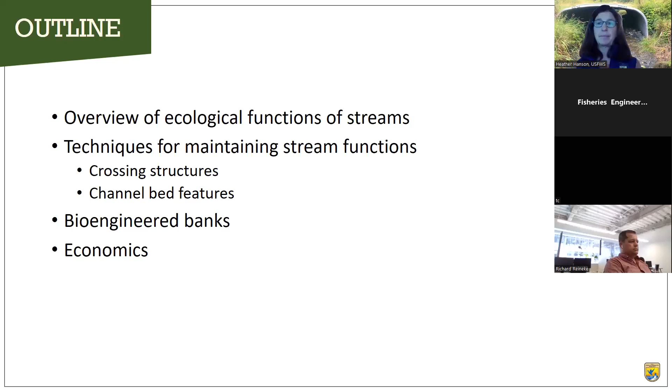So, stream ecosystem functions. Streams provide many ecosystem services to aquatic and riparian communities. These communities are more than just a collection of organisms; they are interconnected by numerous ecological relationships that are both biological and physical. Streams help support those interconnected relationships. This is a list of some of the functions that are important to stream health and ecosystem health.

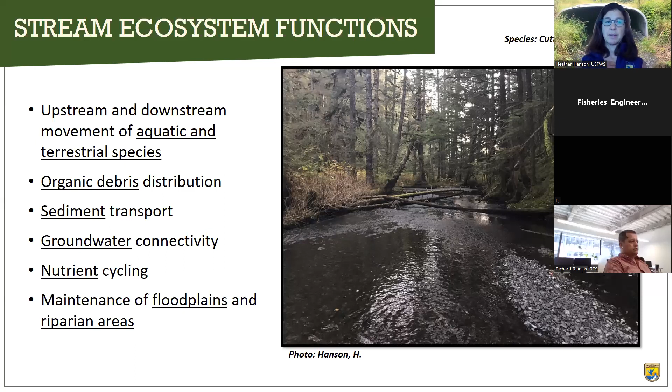All of these processes can be disrupted by man-made infrastructure such as undersized culverts. In the next few slides, I will give you an overview of these stream functions and some of the negative impacts that we are concerned about in our habitat restoration work.

In order to understand stream ecosystem function, it's important to broaden our vision and think about the wide variety of aquatic and terrestrial species that are reliant on healthy stream corridors. Some of these species are strong swimmers and excellent jumpers, like adult salmon, but others can't jump at all, like Pacific lamprey. And some terrestrial species may need extra headroom, like this moose.

Our restoration work focuses on removing or replacing undersized culverts on salmon streams. So I want to elaborate a bit more on the habitat needs for salmon.

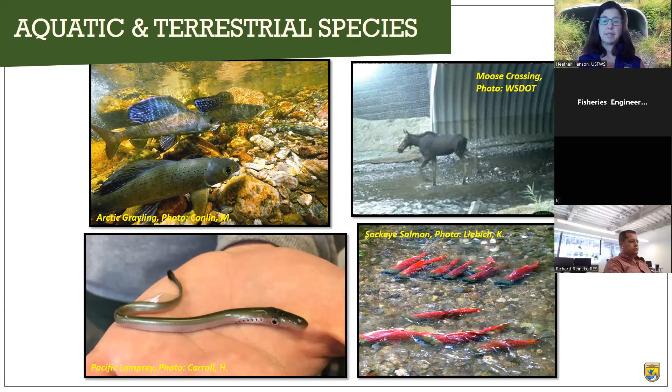Rearing habitat for juvenile salmon is often the limiting factor in the success of a stock or population. In Alaska, coho, chinook, and sockeye salmon spend their first one to three years in fresh water. Salmon use streams to move between freshwater habitats in their early life stages, moving up and downstream to find optimum water temperatures for feeding and overwintering.

Lake temperatures can be too hot in the summer, so they may move to small headwater streams. In the winter, small streams often freeze solid, and the fish will move to lakes or larger streams. They also move to find food: eggs, decaying salmon, caddisflies, and other insects. Very small streams can help juvenile salmon escape from larger predator fish like trout or pike.

Small to medium-sized streams are where we often find undersized culverts and opportunities for our restoration work. We focus on the needs of juvenile salmon and their habitat because their survival is important to increasing the overall abundance of adult salmon.

So streams are more than just travel corridors for aquatic and terrestrial species. They also convey wood debris and other organic materials. Woody debris is a dominant habitat-forming feature in forested streams. Debris accumulations create pools, scour holes, and change patterns of sediment deposition within the active channel. Wood also provides cover and a home for prey species and reduces water velocities.

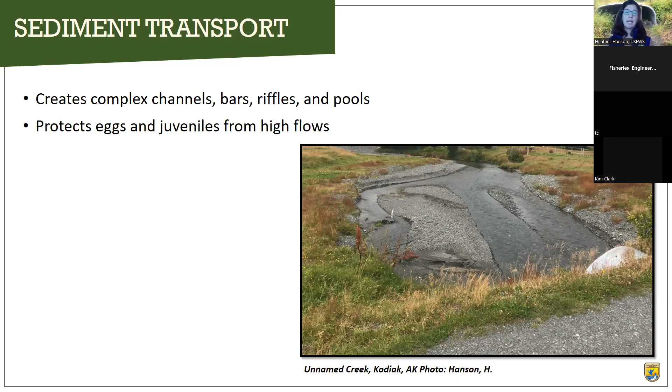Unimpeded sediment transport is important for many reasons. It creates complex channels, bars, riffles, and pools. It protects eggs and juveniles from high flows. It provides habitat for invertebrate prey. It sequesters and recycles nutrients. And it provides a vastly increased surface area for biofilm and algae.

Groundwater connectivity is another important issue for maintaining stream function. The hyporheic zone is the region of porous sediments where groundwater and surface waters exchange, and it is important to stream health. It helps sustain microscopic creatures and other invertebrate prey species, and it also improves water quality. Connectivity through this zone helps to maintain cooler temperatures in streams and wetlands during hot, dry periods, which is important for salmon to survive and thrive.

We often prioritize restoration projects in streams that have a higher level of groundwater connectivity because they are important thermal refugia for juvenile salmon when temperatures rise in the summer.

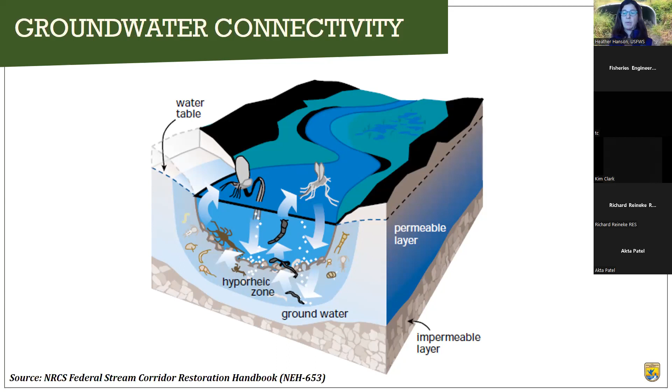Nutrient cycling is another important stream function. Salmon is a keystone species, and aquatic connectivity is necessary to make sure adult salmon can return to spawn, but also to provide key nutrients to the ecosystem. One study in the Pacific Northwest documented 137 species as dependent on salmon.

41 are mammals, including orcas, bears, and river otters. 89 are birds, including bald eagles, Caspian terns, and grebes. 5 are reptiles, and 2 are amphibians.

In that study, they found that just 6 to 7% of historic levels of marine-derived nutrients are reaching streams. Some streams that are thought to have habitat deficiencies are in some cases just starved. In Alaska, salmon-derived nutrients can persist in stream biota up to 9 months after inputs.

So most people picture a stream as a ribbon of flowing water, but the main channel is a small part of a stream corridor. This slide shows the wide variety of important habitats that are available to many different species in the floodplain and riparian areas in stream corridors.

Floodplain habitats are especially important for juvenile salmon. They provide cover from predation, refugia during high water, and food during their first few years of life before they smolt out to the ocean.

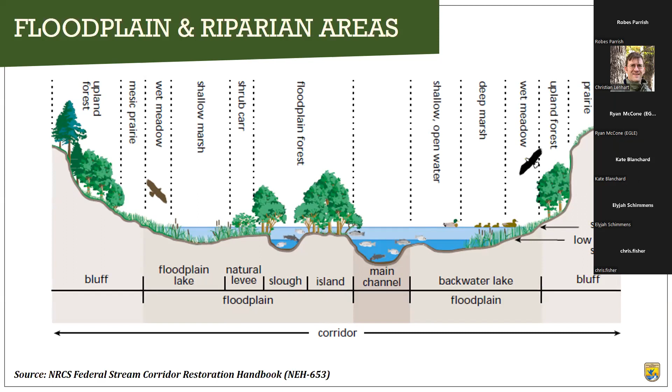I think this visual is useful to compare a stream that is providing minimal ecological function versus one that provides for a full suite of stream functions. I'm picking on this creek on the left because it is from my hometown. This concrete lined channel was constructed in the 1930s after a major flood event.

Fish passage has recently been improved at this location, roughness elements here, and resting pools have been added. Most of the other stream functions have been lost due to the concrete lining and the levees that continue for several miles and cut off all floodplain, groundwater, and riparian area connectivity.

Conversely, the stream on the right has deep pools, cool water, good spawning gravels, woody debris, and low banks that allow for connectivity with the floodplain. It's pretty much salmon heaven if we make sure that they can cross the road and access this habitat.

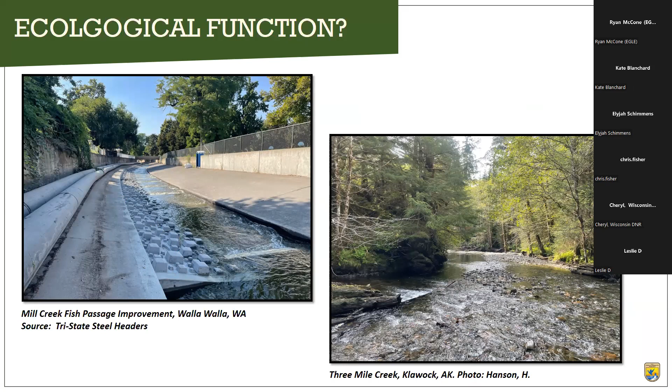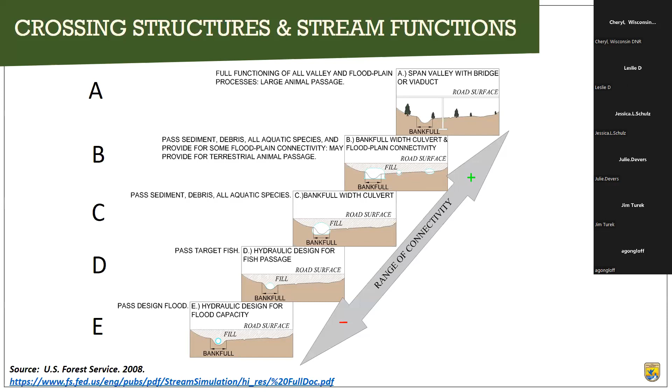This requires a crossing structure that is at least bankfull width or greater. Floodplain culverts may also be added to provide some floodplain connectivity. Here's an example of a culvert that is bankfull width with a floodplain culvert set at the bankfull elevation.

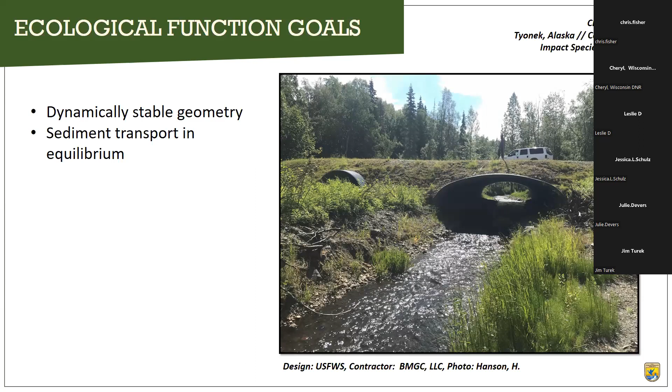Our functional goals for new culverts and bridges that we replace are: we are looking for a dynamically stable geometry. We want to maintain sediment transport in equilibrium at the crossing with the upstream and downstream reaches.

We want to see natural substrate in the pipe. We want to make sure to provide space for woody debris to move through the system, or through the culvert, at high flood flows.

We want to provide passage for all aquatic organisms. We want to provide terrestrial wildlife passage as much as possible. Obviously, that's somewhat limited in some cases where you don't have the headroom for larger creatures to go through, but there are some. Just providing banks and overflow culverts can help with that.

And we want to increase floodplain connectivity as much as possible.

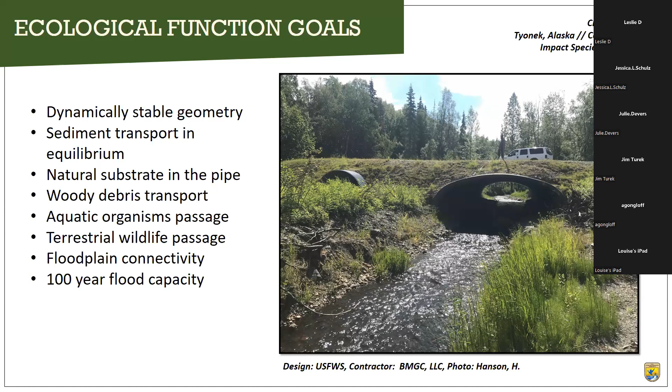Finally, we do design for a 100-year flood. Typically, the design flood on roads in Alaska is the 25 to 50-year flood. By designing for the 100-year flood, we hope to improve the longevity of these crossings we invest in, and improve the ability of these structures to withstand the higher flood flows we are seeing in Alaska due to climate change.

In order to achieve our stream function goals, our approach has been to heavily rely on a geomorphic analog for design of a stream crossing. We try to mimic the reference reach hydraulic geometry up to the bankfull stage, which is the flow stage where water leaves the channel and spills onto the floodplain.

We rely on the bankfull geometry rather than the active channel width or the ordinary high water width, because the bankfull geometry is a result of the hydrologic and physiographic setting of any given stream. In most systems, the bankfull stage falls between the 1 to 2 year flood flow.

If possible, we collect a reference reach profile and cross-section from the same stream where the crossing is located. I say 'if possible' because sometimes there isn't an appropriate reference reach for that, but if possible, we try to stay on the same stream.

The data we collect includes the bankfull channel slope, width, mean depth, max depth and area, and the low flow channel area and depth. Mimicking the reference reach geometry helps us maintain sediment transport in equilibrium with the natural channel.

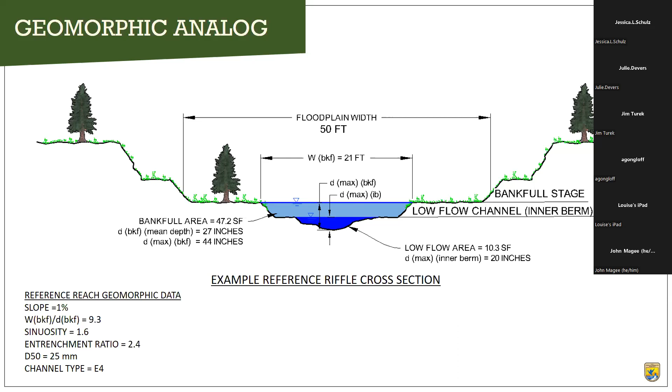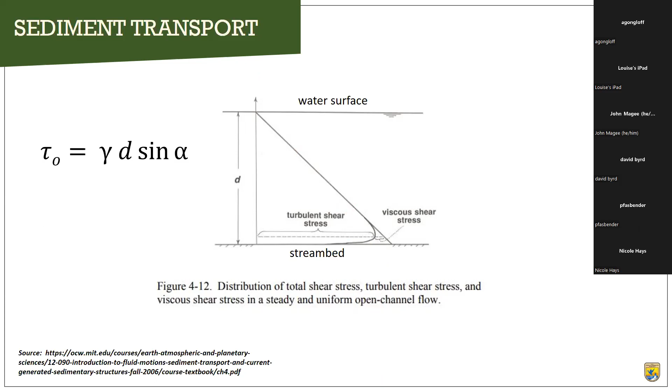This equation has implications for how we design the channel at our crossing. In order to maintain sediment transport equilibrium between the natural channel and the one we construct at our crossing, we maintain the hydraulic geometry at every stage up to bankfull. This is because the flows up to the bankfull stage are responsible for removing the majority of sediment in an alluvial system.

In order to avoid aggradation and resulting loss of the low flow channel, we try to maintain the mean flow depth for all discharges up to the bankfull stage.

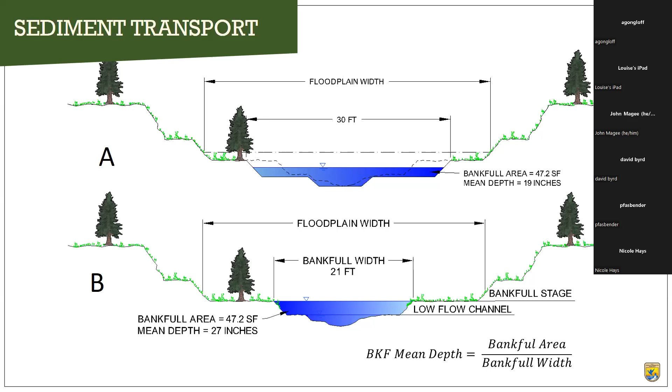So that covers flows up to the bankful stage or up to the 1 to 2 year flood flow. But at higher flows, unless our crossing structure spans the full floodplain width, we're usually going to be somewhat constricting the flow compared to the reference reach. This creates higher shear stress in the crossing structure at those higher flood flows. So here we're talking about the 2 to 100 year flood flows or greater.

We have some strategies for dealing with that. This is one approach I have already shown, where we provide a bankfull width primary culvert and floodplain culverts, with their inverts set around the bankful elevation. In the primary culvert, we provide headroom for woody debris to ensure debris can move through the system and help maintain habitat complexity. The floodplain culverts help provide floodplain connectivity and reduce shear stress in the primary culvert.

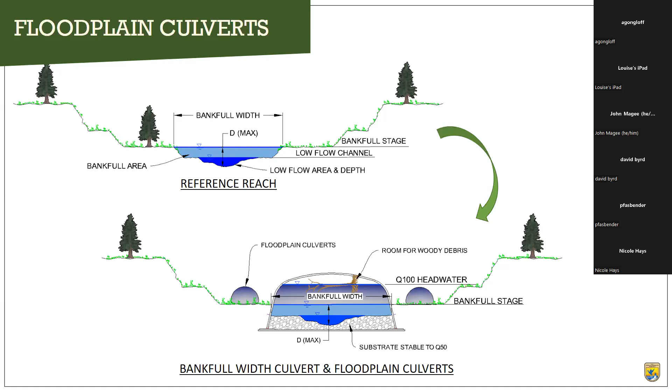This is an example of a small bankful width culvert with floodplain culverts that was constructed in Tyonek, Alaska.

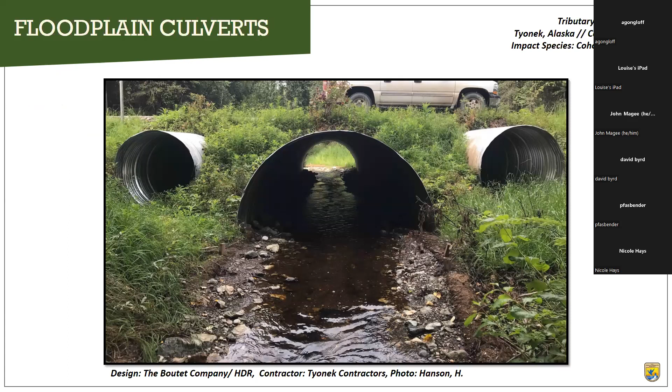Here's another approach: a wider culvert with stream banks constructed inside. Because maintenance of these banks is important to maintaining the bankful geometry, we design them to be stable up to a 100-year flood. Constructing stream banks inside a culvert improves stream function.

Pit tag studies have shown juvenile salmon passage actually increased once the flood flow overtopped the banks because the fish were able to use the slow water and roughness in the banks. So this is pretty cool how it really emulates what would happen in the natural stream, where juveniles would use the floodplain habitat to escape high velocities.

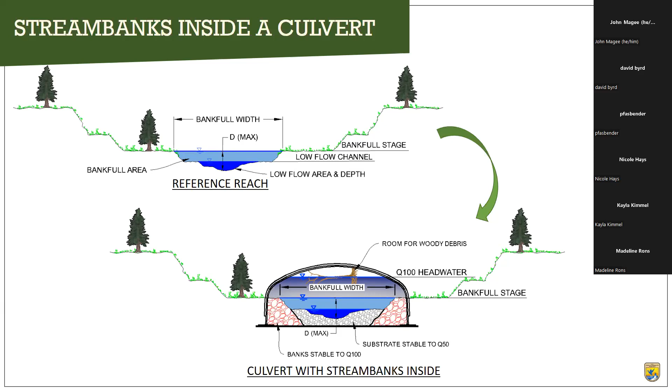This is an example of a culvert constructed with stream banks inside. The substrate in this culvert was designed to be stable to the 50-year flood flow. It has medium and finer particles mixed in to make a well-graded mixture, and Jess will touch more on that. This picture was taken about 2 years post-construction.

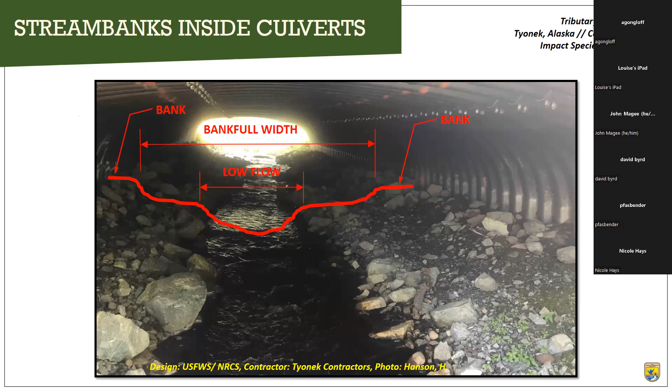Open bottom culverts are another option for improving stream function at a crossing. They allow for hyporheic exchange to take place and improve groundwater connectivity. We often end up using these structures on medium-sized and larger streams.

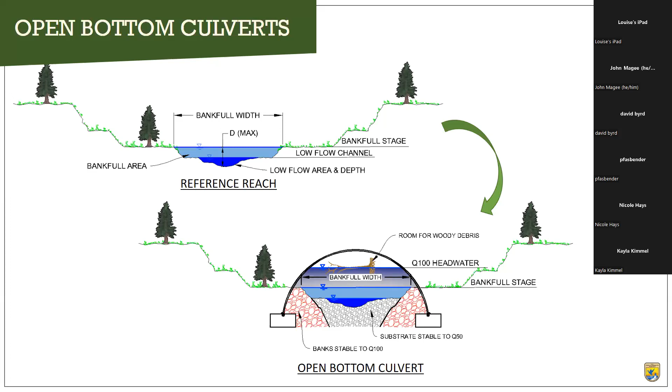This is an example of an open bottom culvert. Large rocks were used for the banks inside this culvert, which is fine, but they could have been better filled in with sediment to prevent fish entrapment on the falling limb of the hydrograph. Overall, this culvert has been functioning well for the last 8 years.

I want to point out that sediment transport is happening through the channel cross-section, with spawning-sized gravels being transported along the stream bed.

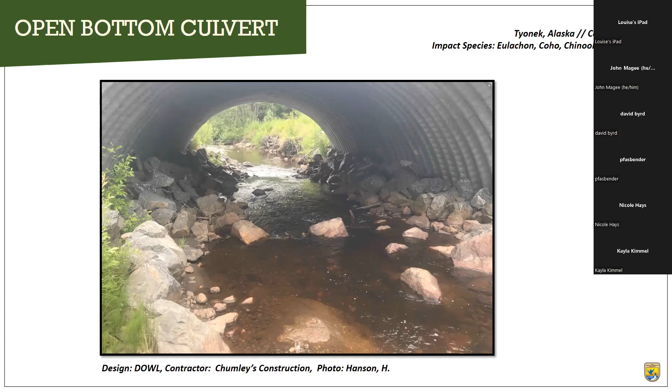Tidally influenced crossings are challenging. This site originally had a fish ladder that was ineffective most of the time. You might think culverts located where a stream outlets into the ocean only need to be passable to adult salmon. However, there have been telemetry studies documenting juvenile salmon moving through saltwater between watersheds during their rearing life stage. So we try to make tidal culverts passable to all life stages 90% of the time.

At this project, the culvert was replaced with a bridge and a roughened channel was constructed from the crossing down to the mean low tide elevation. Despite the large waves that sometimes hit this beach, the channel is still looking good 4 years after construction.

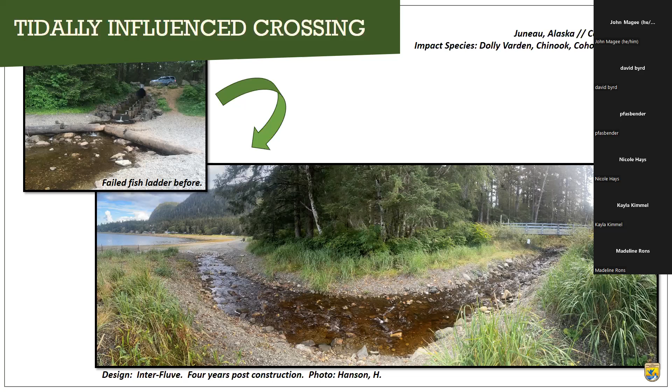Now we are going to dive into how channel bed features can be used to improve stream function. This is a list of the bed features we are going to show you. We're going to show you some that have been successful and some of the pitfalls and problems we have run into as well.

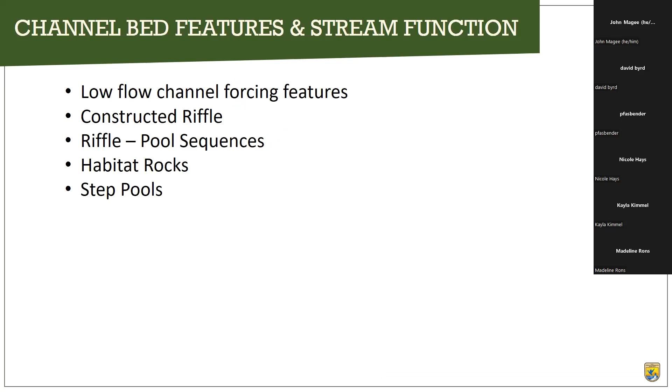One of our major concerns is the low flow channel. During low flow times of year, we want to make sure the flow is concentrated into a low flow channel that will provide sufficient depth for aquatic organisms to continue to move through the system. We use our reference reach cross section to size the low flow channel.

We have found that inside a culvert, forcing features constructed of larger, stable rock are needed to maintain a low flow channel. So we designed these forcing features to the 100-year flood. We think of these features as emulating the wood in a forested stream. They create local scour, which helps maintain the low flow channel.

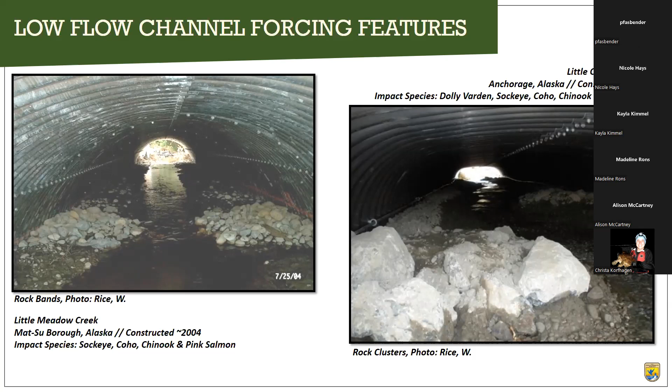This culvert was designed with substrate to be stable up to the 100-year flood. It is located at a lake outlet where stability was important because there are several businesses upstream and docks.

Another issue with a lake outlet is there's virtually no sediment supply that's going to run through this culvert from the lake. So we designed all of this for the 100-year flood, but during construction, we actually added some larger rocks as forcing features to really force that low flow channel.

A couple of lessons learned on this culvert. I wish we would have added some finer materials in the top 6 inches, in this area, to allow for some scour processes to happen. Also, we should have sloped the bed away from the culvert walls. Fish can be trapped here at low flows.

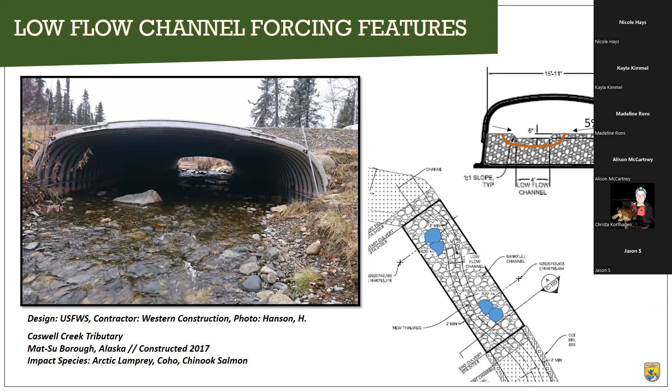This is another example of rock clusters in a bankful width culvert. The addition of finer substrate in the low flow channel helps to allow the scour to happen and better maintain the low flow channel. In the future, I would like to try adding some finer substrate below the low flow channel as well to allow for channel adjustment. And with doing that, we still need to maintain our stable streambed substrate in the culvert so that it doesn't get washed out at those higher flood flows.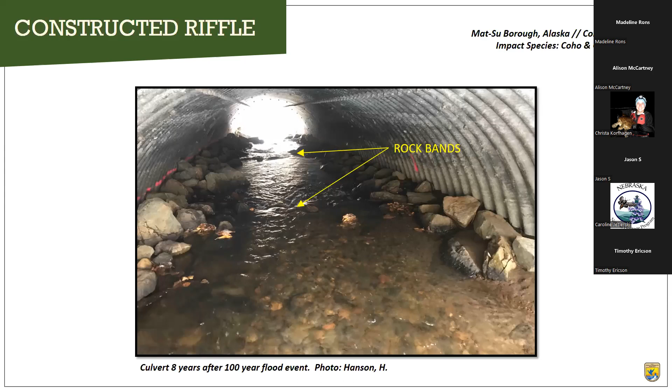This photo was taken 8 years after a 100-year flood event. This is the only riffle pool sequence we ever attempted inside a culvert. Riffle pool sequences on natural streams are a result of stream meanders. The rotational forces on meander bends maintain the pool geometry on these types of bed features. Inside this straight culvert, we did not have the meandering plan form to maintain the pools over time. They also took a lot of time and oversight to construct.

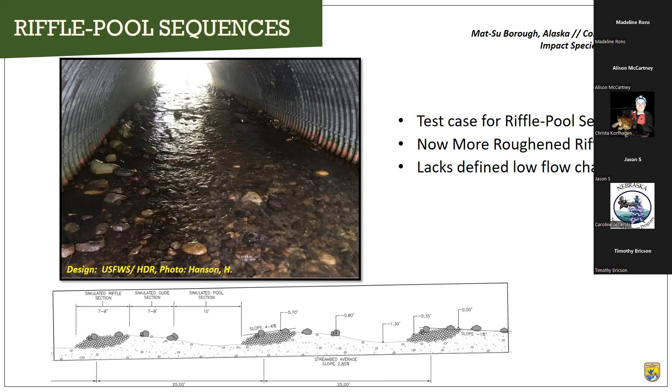After a 100-year flood, the substrate in this culvert flattened out, and it has turned into a roughened riffle. There isn't really a low flow channel because we don't have any forcing features. This is not an approach we would take again.

So I will turn this over to Jess, and she will now share a project that we completed recently using step pools for the channel construction.

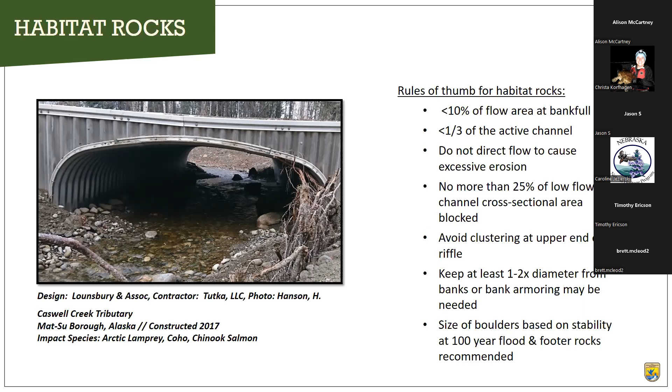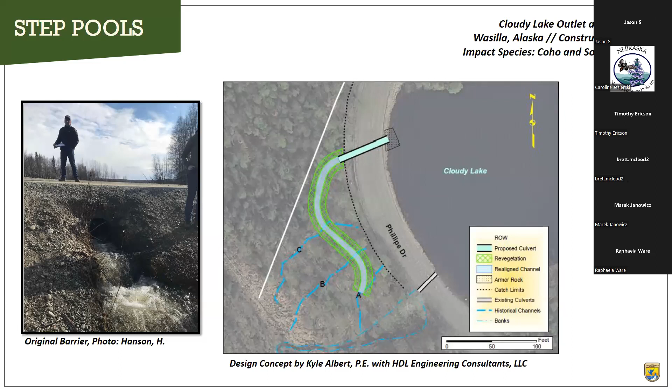So the design concept was to relocate that outfall and tie into one of the existing relic channels, effectively bypassing the existing culvert's steep outfall channel.

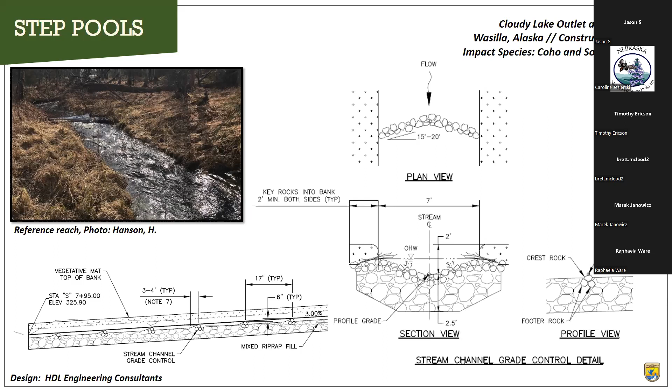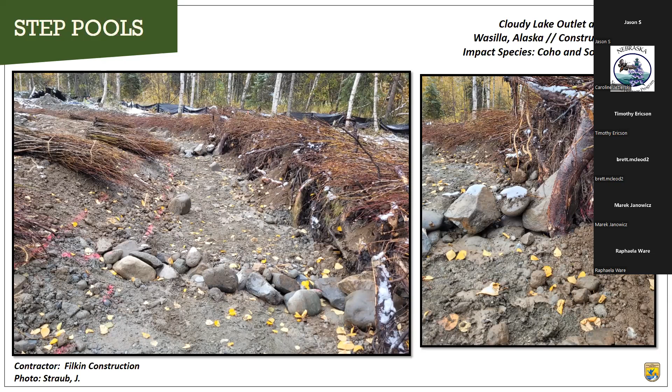This location has experienced higher than average flows this last year, so we're happy with how it's held up. It's been a good test of the performance of these features in this constructed channel.

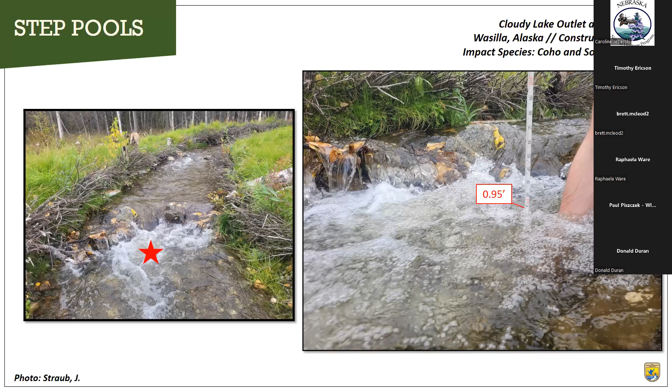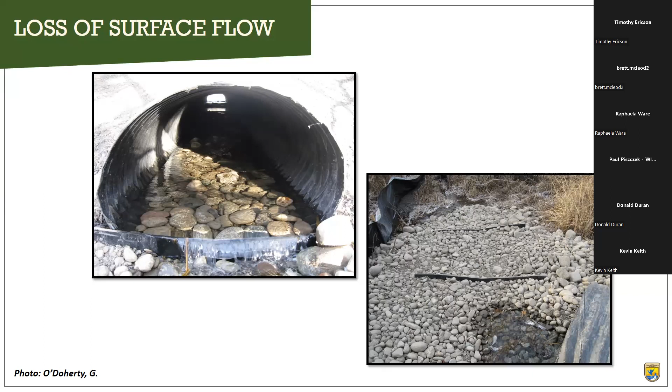To avoid this problem, we use techniques to ensure the creation of a strong stream bed that really mimics the natural bed. Having well-graded substrate is one of these techniques, using a mixture of coarse and fine material.

During construction, we mix the substrate materials prior to placement in the pipe. This is really the only effective way to get a well-mixed, well-graded substrate. Another approach we've seen used is to place the larger material first and then attempt to wash the finer material into those void spaces.

A problem with this approach is it's really impossible to get that mid-sized material into the void spaces, and you end up with gap-graded material. The finer materials end up getting washed out in higher flood flows with this approach, so we don't recommend it.

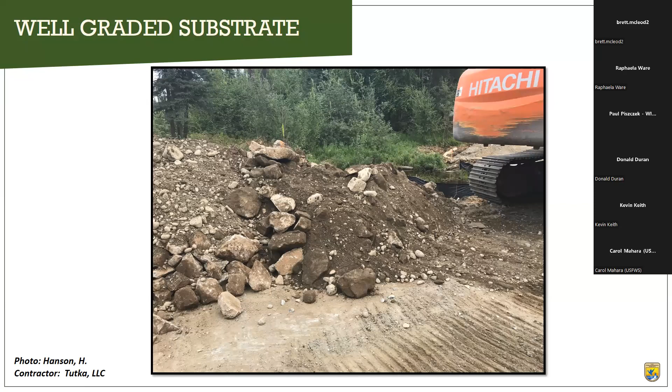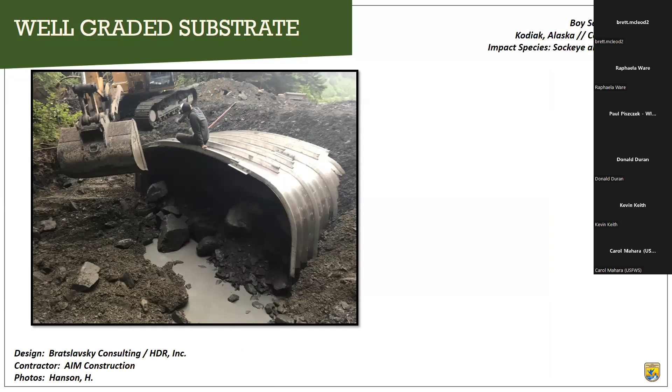Here is an example of a well-graded substrate being placed. In this photo during construction, you can see the pre-mixed pile in the background prior to placing it into the pipe, and on the right is the finished product. The substrate contains a well-graded mix of riprap and finer materials with a max rock size here of 30 inches.

This culvert was constructed at a lake outlet in Kodiak and is a fairly steep location. Those factors drove the designer to use a larger size of rock than we might typically see in a stream this small. The contractor did an excellent job of placing these rocks inside the culvert to really mimic the bedrock controlled reference reach for the system.

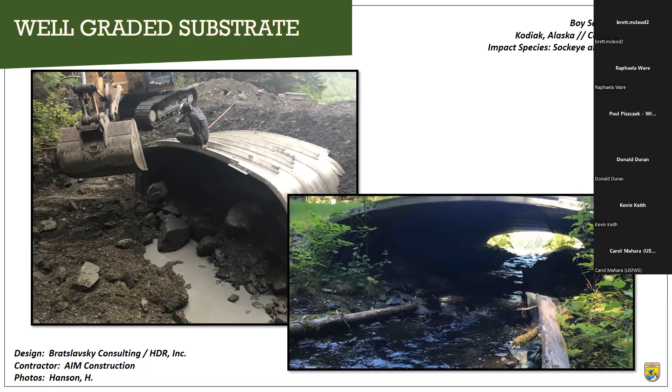Filling in those voids is one vital technique to create a stable stream bed and channel forcing features that will last—washing down the substrate and filling in those voids. We have this well-graded, pre-mixed substrate of coarse, medium, and fine material, and we've constructed the channel's geometry and stream bed features. Now we are ready to wash the substrate down for the entirety of that newly constructed channel. This slide shows a photo of a constructed channel pre-wash.

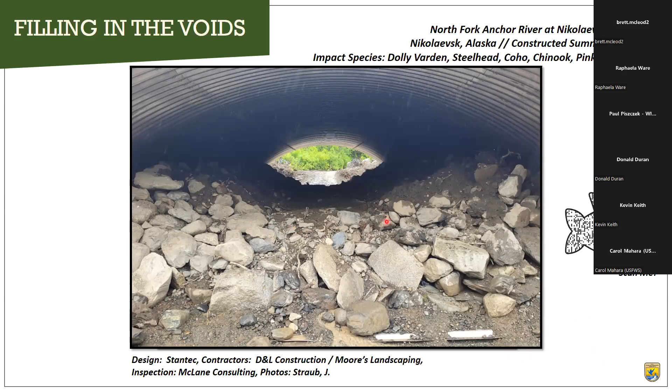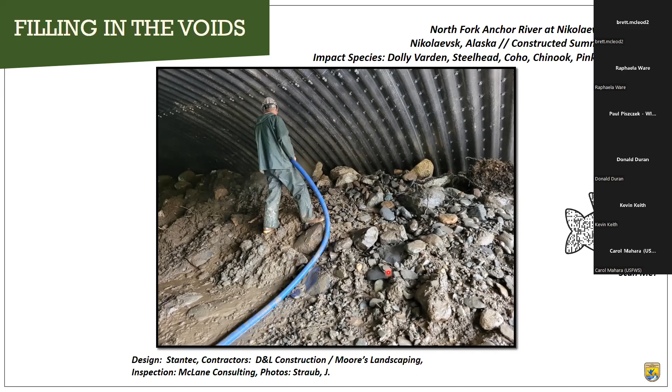This second photo shows the post-wash and pre-wash, with all those fines settling down into those voids. This last photo is after that material has been washed down a few times and the voids have been filled. This process allows the larger size material to remain on top of the bed surface and create an armor layer, similar to natural stream processes. The armor layer protects the finer material within the substrate, reducing the permeability and keeping water flowing on the surface—you can see water pooling here.

We really do have to do this sometimes two or three times to get the desired outcome. We have a video that demonstrates some of the washing and fine techniques on how to create that well-graded, low permeability substrate. You can scan the QR code here, but all of our QR codes will also be available after the presentation today.

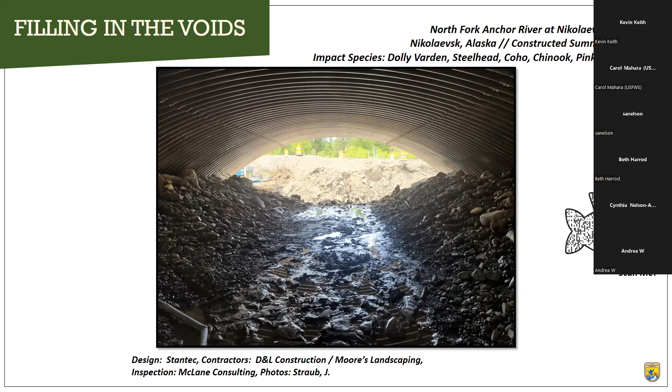Moving out of the stream bed and onto the stream banks, we use bioengineered stream banks to tie the newly constructed stream section aesthetically and structurally into the stream channel upstream and downstream of the crossing. The root system and foliage provide protection from predator species, increase roughness to reduce water velocities, and provide shade to reduce water temperatures.

We use bioengineered stream banks because they're sustainable, cost effective, and a great way to stabilize the bank channel, helping provide a continuous riparian corridor that improves habitat connectivity for aquatic and terrestrial species. We typically follow the Alaska Department of Fish and Game Stream Bank Revegetation and Protection Manual, available with this QR link. ADF&G is currently updating this manual, so we expect a new version soon. To protect the culvert and road features, we use riprap and headwalls at the inlet and outlet.

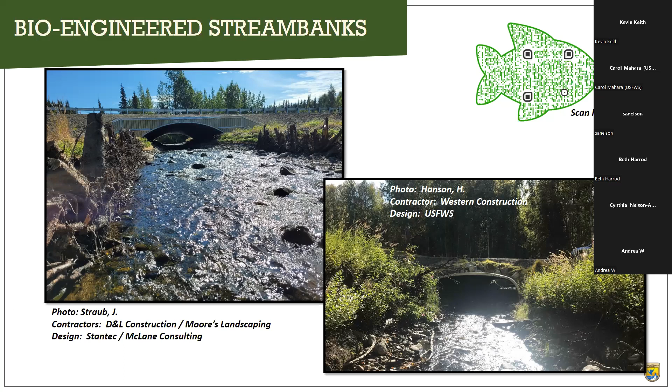Toewood, putting toewood in the banks, is one of those bank reconstruction techniques not currently in the ADF&G manual, but we've found it very useful for stabilizing the toe of the slope. It allows revegetation to establish on the bank benches upstream and downstream of the culvert. This is a great technique in lower energy systems with good floodplain connectivity.

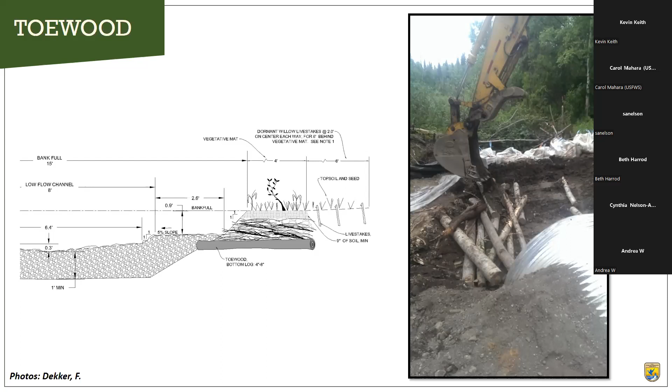In this drawing detail with the corresponding construction photo, we see the interlocking of 4 to 8 inch diameter logs, used with rocks and backfilled with topsoil to the bank full elevation. Now the top of the bank is ready to receive vegetative mat. Sometimes we use smaller branches in lifts to bring the bank up to the appropriate design elevation, though in this example that was not needed.

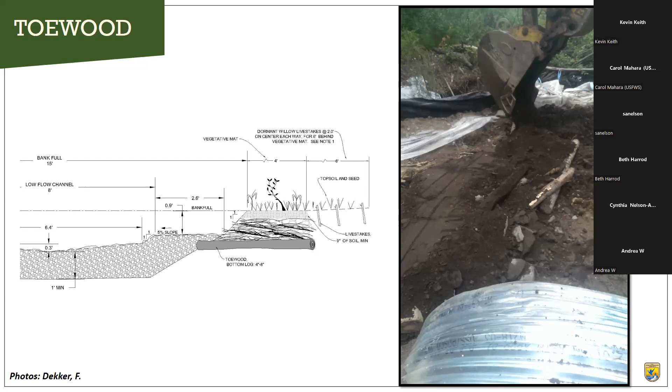Here's an example of vegetative mat being placed along a stream bank. We prefer to always place vegetative mat for the first 4 to 6 feet along the bank because it establishes so much faster than seeding. The vegetative mat is usually sourced near the construction site, and if possible we harvest and transplant it on the same day. We've had great success with plant survival and are able to establish more appropriate riparian species around the stream using this method.

A lot of landowners and engineers have concerns about these techniques and their cost compared to traditional culverts. Heather is going to go into this a little more in detail.

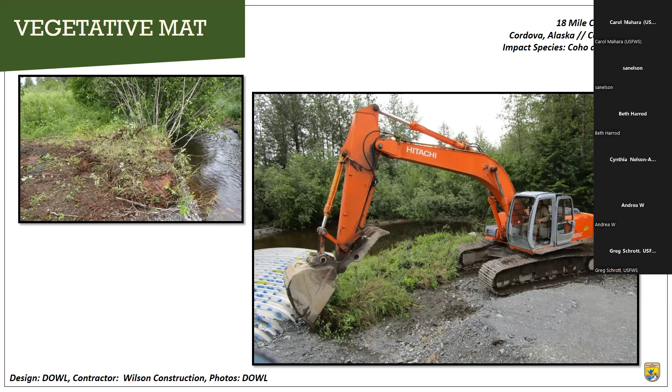As Jess said, a common complaint is that it's too expensive to construct these larger crossings and replicate the natural stream inside the structure. However, we need to consider life cycle costs to understand why this makes economic sense in the long run. Undersized culverts result in debris plugging, road failures, and icing that often flows over the road, as you can see in these pictures. Maintenance costs and emergency replacement costs are high.

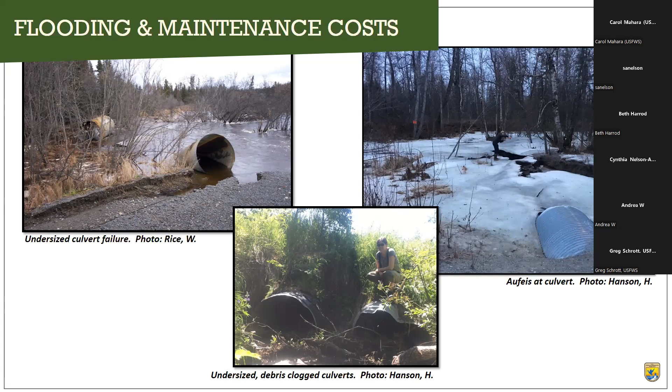One study in Wisconsin looked at 461 undersized culverts and considered only the cost benefits of reduced replacement and maintenance costs. Culverts sized at 1.1 times the bankfull width resulted in fiscal lifetime net benefits for over half of the culverts sampled. Other cost benefit analyses have reached similar conclusions. Investment in ecological function can pay off even when you just consider the maintenance benefits.

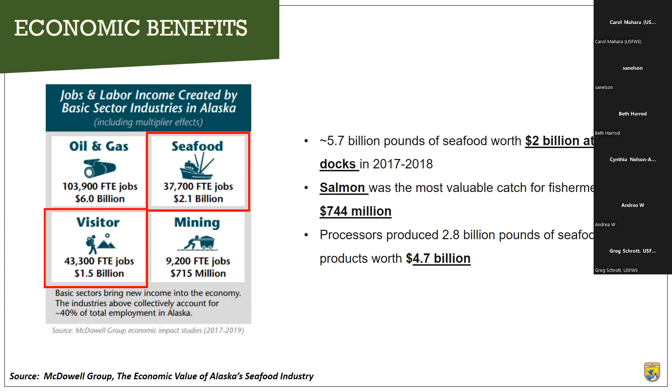Besides maintenance and flooding costs, undersized culverts result in a loss of ecosystem function and fish habitat. In Alaska, this has consequences for the commercial seafood and tourism industries, which rely on functioning habitat to maintain healthy fish populations, a renewable resource that forms the foundation of these industries.

Finally, by maintaining functioning habitat, we are helping to protect a sustainable, reusable resource that will continue to benefit future generations.

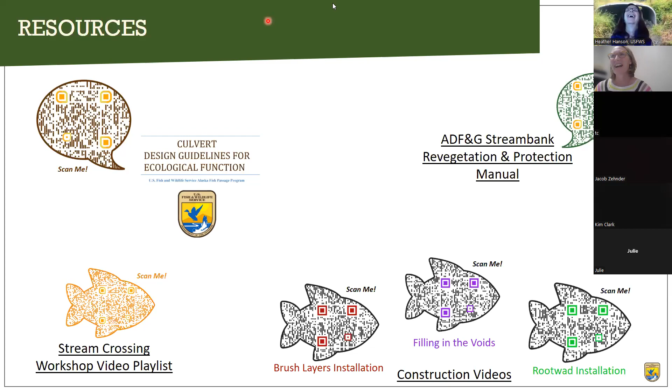Wow, you got a lot of questions here. People are all over this. I think some of these you may have answered once we really got going, but I'm still going to start at the top and give you a chance to say that was covered, or go over it quickly. All right, first one: how do you avoid or address sediment and debris buildup?

I believe that question came in when you were showing the early pictures of the culverts you were sizing. Well, we don't get debris buildup because we allow the debris to pass through the culvert. That's how we avoid or address it.

Have you seen large woody debris moving through these culverts? Yes, we have. In fact, we had a project where we put some woody debris out for habitat, and the next year it all washed through the culvert. Sounds like another great QR video to put together. Another lesson learned.

Have any significant erosion occurred on the banks within culverts? Have they required any repairs? Yeah, I think we have lost some stream banks in the culverts. When that happens, the problem is that we can lose the low flow channel because it gets widened. We had a culvert designed at 1.5 times the bankful flood or bankful width, and that ended up needing some repair. We've also had a culvert that basically head cut because we didn't get the grade right. We've had culverts that were undersized a bit because we didn't make them wide enough. So we started really sticking to this bankful width, and since we've started sticking to it, we haven't seen that problem.